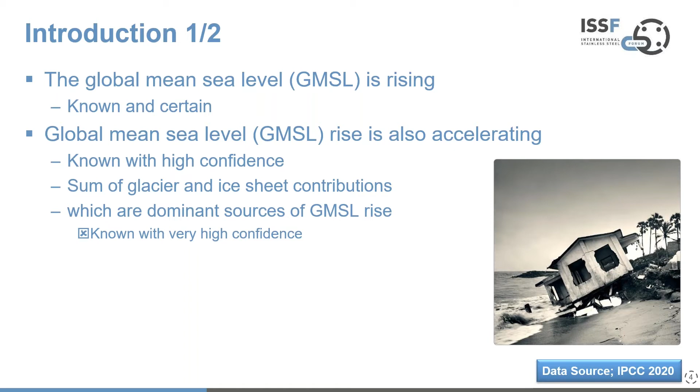It's not just rising though, it's actually accelerating, and this is understood with a high degree of confidence. And really there are two main features. It's glacier melting and contributions from ice sheets melting, and these are the dominant two sources. Again, this is understood and known with a very high degree of confidence.

However, we need to link all these developments to the United Nations Sustainable Development Goals. And looking at what's known as climate resilient development pathways, this requires some serious effort to contain sea level rises, because you can't just switch these things off. And when I get to some of the charts that actually show what's happened historically up to 2020, and then how that is likely to look in the future, you'll probably see that we do need to take some significant efforts.

Now, through the course of this webinar, we're going to look at a number of approaches for protecting our coastlines. But there are two key approaches that are really worth considering and need to be considered. That's hard protection, building a barrier, and what's known as building advance, building out into the sea. And these are two arguably economically efficient approaches because you deliver protection, or you avoid land being swallowed up. And for urban settings, this is well understood and well used.

However, because you're offering protection, taking a long-term view, actually you don't see the impact that potentially could come later. So there is a risk associated with hard protection if it's not really thought about in a long-term setting. But also, there's the concept of equity concerns here, or the difference between the rich and the poor nations. And the people that are in the most vulnerable areas are probably, in many cases, the poorest nations.

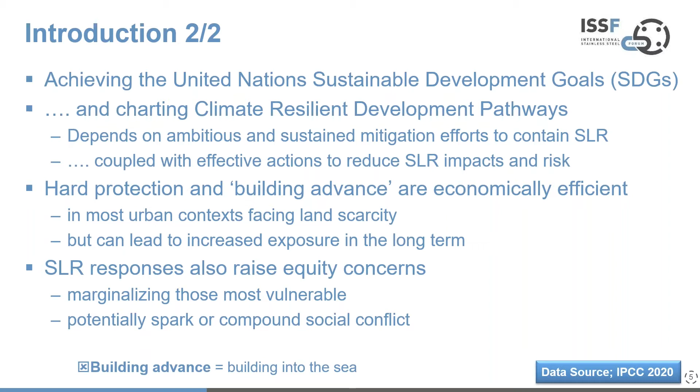I'd now like to move on and talk about global mean sea level rises and illustrate what we're actually facing. So what do we know? So here is some data from the Intergovernmental Panel on Climate Change showing the level of sea level rise over some interesting time blocks. What you can see from those numbers is that since the turn of the 1900s, that increase has been rising, slow at first, but it's accelerating without a doubt. And the dominant cause is something known as anthropogenic forcing. So that's what we do as people. That's the influence we exert on habitats and environments. So the responsibility sits with us, and that's been more and more prevalent since 1970, essentially.

The worrying thing is when you start to look at the trend over the next 80 years, looking at different pathways, and there are many of these representative concentration pathways that have been described, the average sea level rise is going to sit at around 0.6 of a metre, somewhere between 0.43 if we allow the global mean increase in temperature to not exceed 2 degrees centigrade, or closer to a metre if we continue on the path that we're already on. This is the 6-degree increase in global mean temperature scenario. So there's a range of possibilities, but none of them are good, and there's different pathways in the midst of these two extremes that I'm showing at the minute.

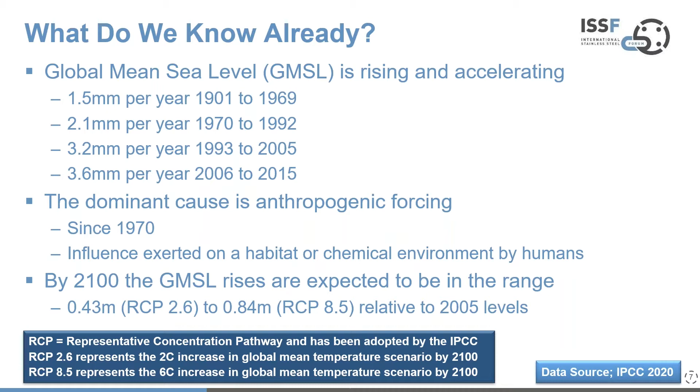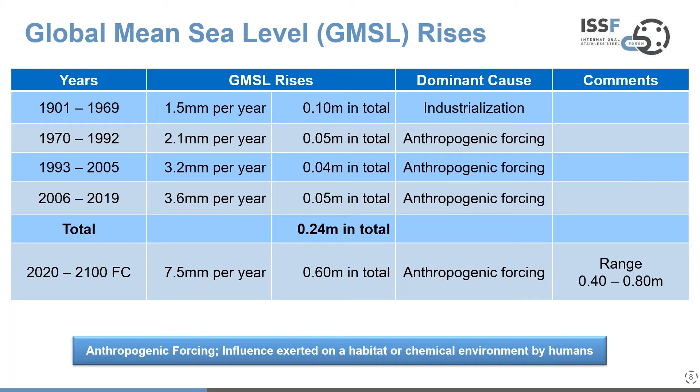So this table just summarizes very simply the same data from the previous table, so I'm not going to go over and describe that, but it puts things in simple context for reference. But also it's worth reflecting on, over the period 1980 to 2015, worldwide catastrophic events and how they've changed. And this chart shows, for specified years, of which there are 5 in this chart, the different number of serious events, whether they be meteorological, hydrological, or climatological. And you've got the description at the bottom of what they actually mean.

But what is absolutely scary is the percentage change in the number of these events in these year intervals that we're showing here. So approaching a 70% increase in total on this combination of events. And of course, hydrological events, which is interesting for this particular webinar, has gone up almost 80%. I don't yet have the data for 2020, so I was not able to show that. But this is quite frightening. And it's also known, and this is Red Cross data, that approximately every $1 spent on reducing the risks from disasters will save around $7 of clearing up damages later. So there's a massive impact. It's a 7-to-1 impact, and that's an important message to take forwards.

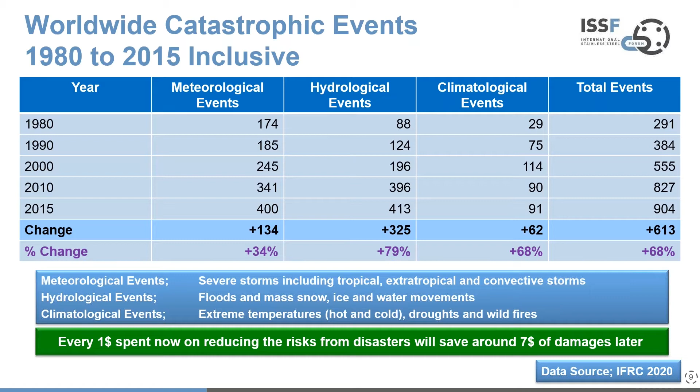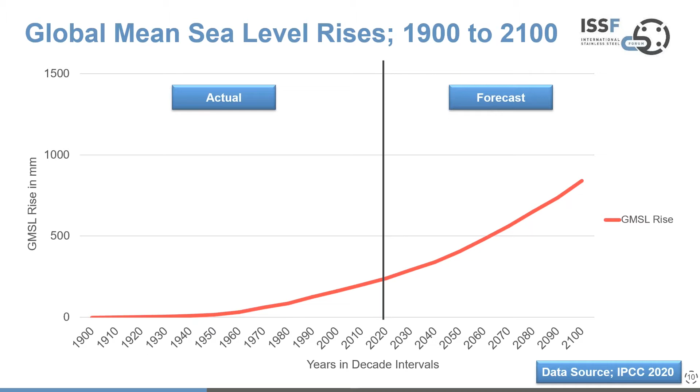So let's have a look at global mean sea level rises. So this is the actual events from 1900 up to 2020, shown on the left-hand side in the actual section, and then the forecast of how it's going. And this is mean sea level rises. So of course there will be some variation around this, but you can see the trend. And if that trend continues, that's quite worrying. Now, just before I move on, note the scale. This goes from 0 to 1.5 meters, this scale. So the next 80 years, we're going to be pushing upwards towards a meter if we change nothing. This is based on the 6 degrees scenario.

If we now put extreme rises on there, you see how the blue dotted line now looks. And these are the variations that we see naturally. So these things do occur. They're not there day in, day out, but these extreme rises will affect different parts of the world at different times. So we have to consider that the average, the mean sea level rise, is not the true picture.

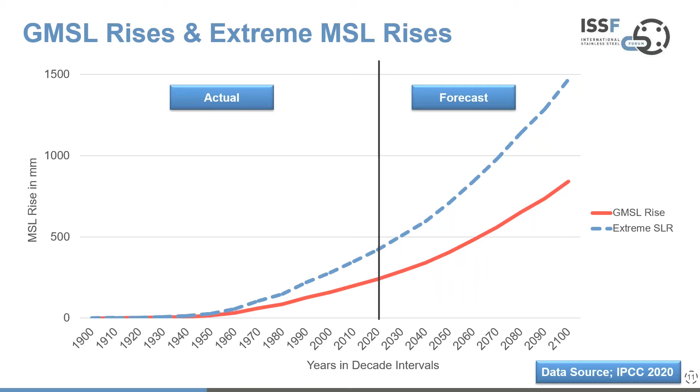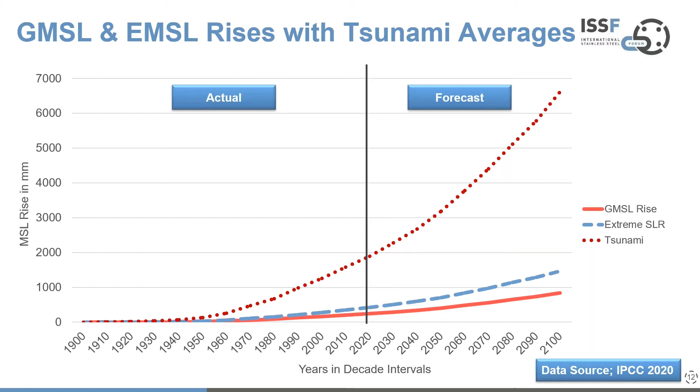And this is the same scale, 0 to 1.5 meters. What I'm now going to do is impose the average tsunami position on this. And now this is a different scale, 0 to 7 meters. And you can see the average tsunami line, the dotted red line, is frightening. So this puts in context, whilst we are facing some significant average sea level rises, there are some disastrous effects that we just cannot avoid. And doing nothing and having a heavy reliance on fossil fuels is only going to make this picture look at its bleakest, I think.

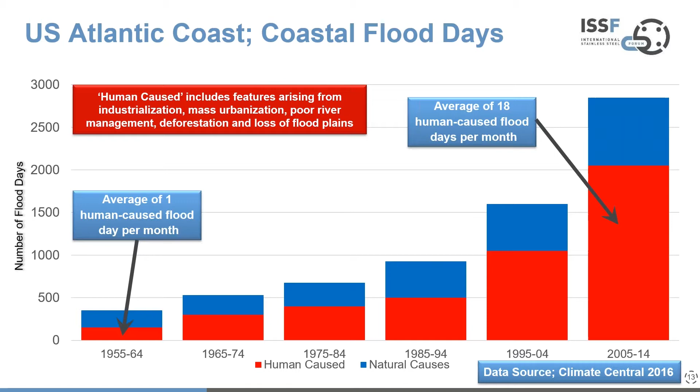We know that we've got increasing average and extreme seawater levels and an increasing frequency and severity of the extreme events. But then we have to balance that up, reminding ourselves that coastlines provide a base for some very important economies. I would describe them as a societal people magnet. People like to go to coasts. We can't change that, that won't change. But also, we are responsible for using coastlines as a dumping ground for undesirable wastes. And there's many, many experiences that we will all remember over history of some undesirable effects.

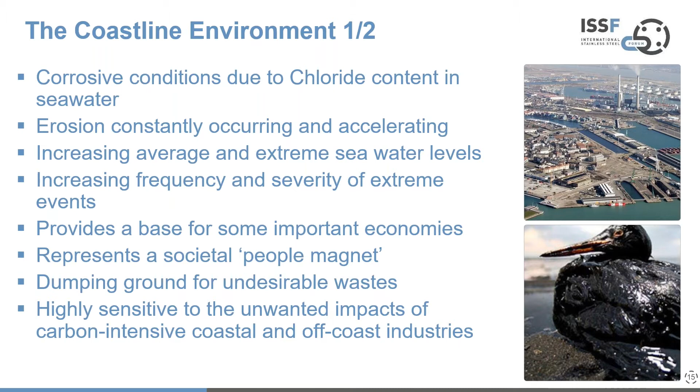But we should equally remember that coastlines are highly sensitive to the unwanted impacts, I should say, of carbon intensive, both coastal and off coastal industries. And they then take a long time to recover. So we've been doing some damage to our coastline for considerable amounts of time. And we already know that coral reefs, for example, are highly bleached, and that will take huge amounts of time to recover. So the first question I'm going to pose is, can we really preserve these idyllic coastal settings, look after the coastline economies, support the coastal ecosystems, provide safe holiday environments? We've caused, as a race, lots of devastation. I think we all have to take personal and collective responsibility for that.

But a question I'd like to pose here is, if we lived a lot longer, if we lived for 250 years on average, would we actually have thought differently? Because we'd then be living with the consequences of our actions. And I think it's important to have that thought in our minds, because that will change what we do in the future.

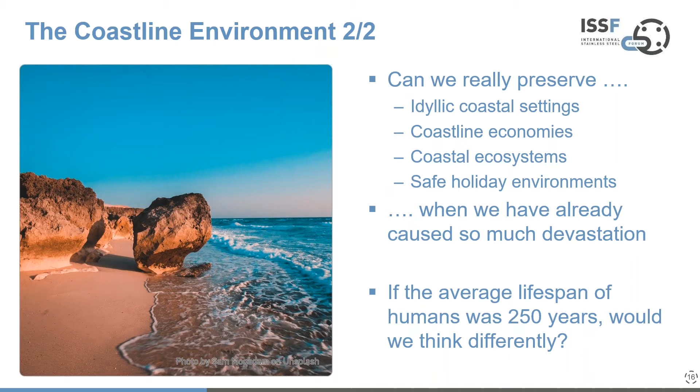We still have a short-term sort of piece of thinking in many of our minds, and I've been equally guilty of that. And that's driven often by installation costs and material costs, considered well before life cycle thinking. But we have to recognise, and we should recognise, that life cycle costing is becoming more important. And from a position of finance companies, they are wanting to see this piece of thinking in new projects.

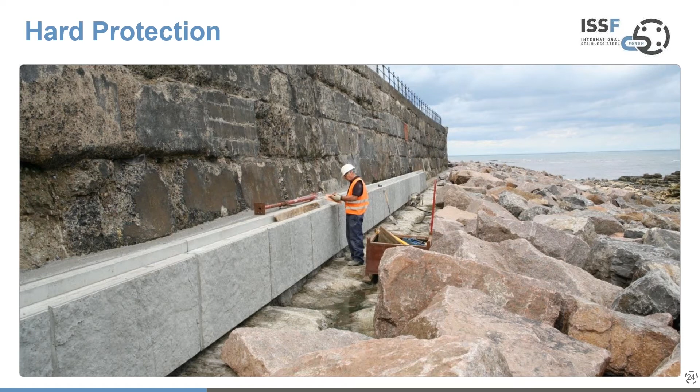So in the area of hard protection, what we're going to start looking at is physical barriers, obvious things. And I've got 2 examples here to illustrate. The first one is the Bayonne Breakwater in France, which was protecting a harbour in France, and there were a lot of ships sadly grounded on this breakwater due to the very rough seas. So the rough seas necessitated the protection, but it was also problematic as well.

And a repair was needed to this breakwater. The requirement was a service life of more than 50 years with 0 future maintenance. But in order to achieve that, the owners knew they needed to seek some technical assistance. However, the project manager who was appointed to this project understood the benefits of stainless steels via the Progreso Pier case, which I will illustrate towards the end of this presentation, where we get to life cycle costing. So there was some understanding that there was a material out there that could assist with this repair.

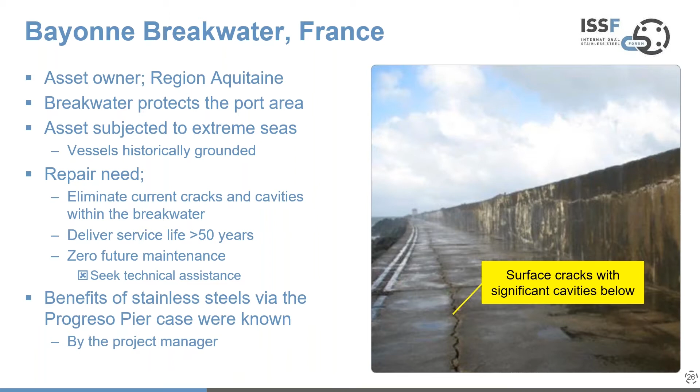So with this solution, we had a material that could not corrode in the environment, but also because of its high yield strength, it meant that a much lower tonnage of stainless steel was needed compared to carbon steel if that had been chosen again. And the original solution was with carbon steel. So there was good reason for choosing a stainless steel here. It ultimately led to a very sustainable solution.

Just as carbon steel is made mainly from recycled steels in rebar cases, so is stainless. So there's no difference there. It's both part of the sort of circular economy, but a real benefit from choosing the stainless option. And we would expect the service life to be closer to 100 years with really minimal maintenance.

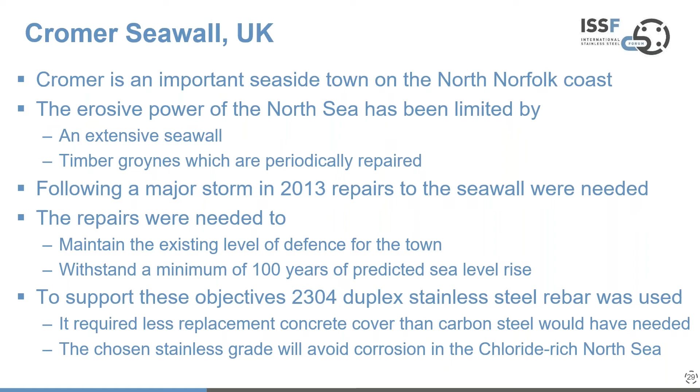So in 2011, Miyako City was hit by a tsunami that was around 10 meters in height. The sad thing was that more than 500 people died, and almost a quarter of the housing of the city sustained significant damage. So this is a real example where an extreme event causes a huge loss of life and major damage to the coastal city. So to cut to the chase here, the response to that was to build a significant seawall, 9 meters high, and 20 lock gates as well along that section of the coast.

Again, this was a case where duplex stainless steel was chosen for the lock gates, and previously they'd worked with an aluminium alloy, so the increased strength of a duplex stainless steel allowed an overall weight reduction per gate, which was really prized, given that aluminium alloys are very light. The construction cost by designing with and choosing a stainless steel was reduced compared to previous designs. There was a huge step up in corrosion resistance, and the design and the height that was chosen allowed this structure to withstand the pressure of 10-meter high tsunami waves.

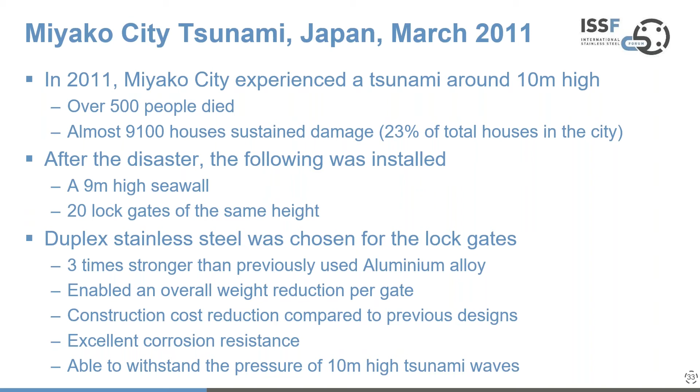Okay, so now I'm going to move on to something a little different and talk about infrastructure crossings. And in this section, we're looking at essentially bridges that cross seaways. And many people will say, why is this a coastal defense thing? What we have to remember in our environment are things like people flows and trade flows that we can't just switch off, to allow our cities to operate as they do, to allow businesses to be successful, to allow international trade to occur in a successful and streamlined manner. We need bridges, and bridges across significant seaways are really important.

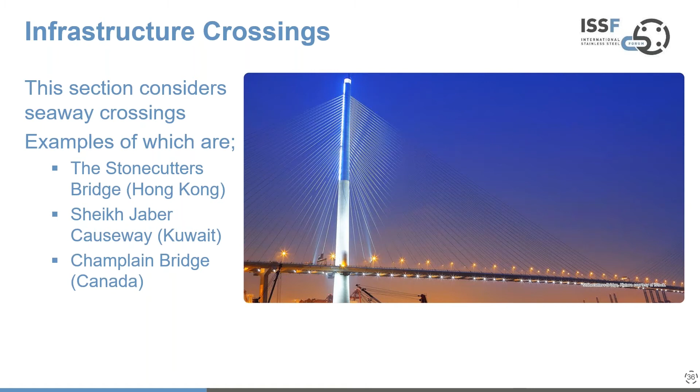And I've listed 3 examples. On the left, the Stonecutters Bridge in Hong Kong, the Sheikh Jaber Causeway, that's just the abbreviated name, in Kuwait, and the Champlain Bridge in Canada. And I'd like for this example to focus on the Samuel de Champlain Bridge in Canada. And there's a beautiful picture of the bridge in all its glory. But let's just put this in context.

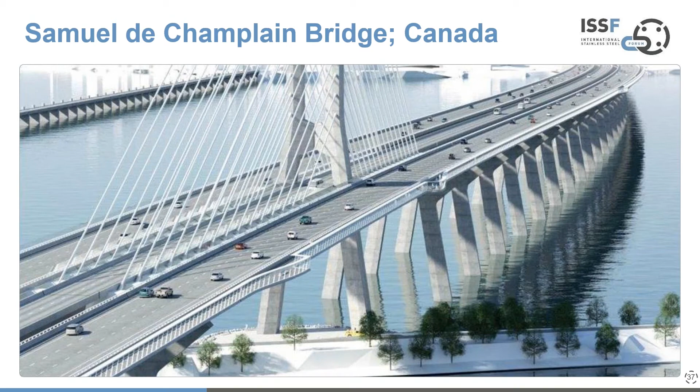So this is almost a 3.5 kilometre long bridge over the St. Lawrence Seaway in Montreal. It's used by in excess of 50 million vehicles per year, including way above 200,000 buses. There are 11 million transit users per year, and of those, 2/3 of them are commuters. So this is why these sorts of structures are important. And also it supports $20 billion of trade between Canada and the US each year.

There was a bridge that was built back in 1962, and this was not designed for either the current traffic needs of when this was looked at in the early 2010s or the future traffic needs. And that structure was suffering from corrosion of the structure and concrete degradation caused by both the seawater and de-icing salts used because of the extreme weather conditions on the St. Lawrence Seaway.

And the degradation of concrete came from volume expansion of the rusting steel inside the concrete, because corroding steel increases in volume due to the volumetric expansion when iron combines with oxygen. And that also changes the pH as you get carbonation of the structure, which causes further degradation of the concrete. So that combination of having a seawater environment, using de-icing salts, a lot of traffic over the bridge causes a lot of problems when you have a rusting product inside the concrete.

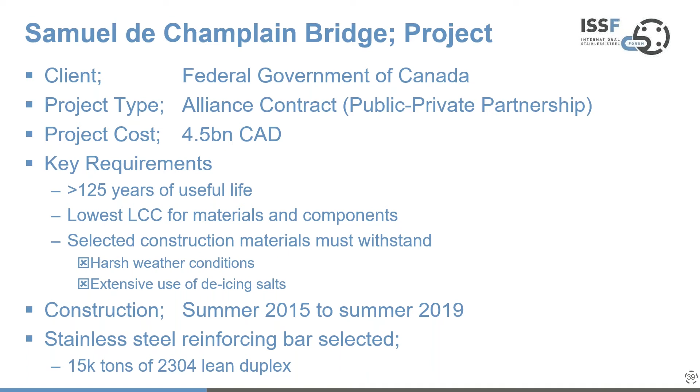The key requirements were at least 125 years of useful life and selecting materials and components with the lowest life cycle cost. And that's important to reflect on. These people were really thinking about life cycle costing. And I've talked about the harsh weather conditions and extensive use of de-icing salts. This is an extreme environment up there on the St. Lawrence Seaway. Construction ran over 4 years, 2015 to 2019, and stainless steel 2304 duplex reinforcing bar was selected. And this was a significant project, 15,000 tons. So very significant use of stainless steels in a single project.

So why, for this project, do they choose stainless? Well, it was one of the few materials that was certain to operate for over 100 years with virtually minimal or zero maintenance. The lean duplex stainless steel was chosen because of that combination of really good corrosion resistance and high strength, particularly with respect to chloride corrosion, as I've mentioned. And it won't require any challenging maintenance regimes. It's important to reflect on the old bridge, the old structure built in 1962, operated for 57 years, but every year it was expensive to maintain. And that's not something we necessarily want. We want to build with a sort of fit and forget mentality in our heads.

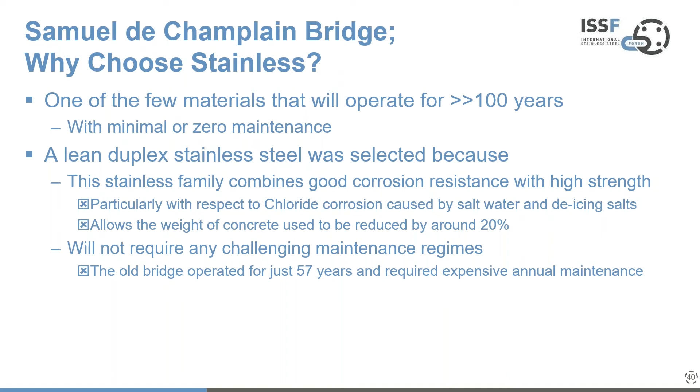And the wall itself quickly dissipates tidal energy. So it acts as a barrier, but in a different way. It's taking energy out of the onrush of water and waves. So it protects effectively high coastline areas, as shown here, where you've got arable land. And one of the things you have to remember is, because these cages are built from a wire structure, in essence, they're subject to both erosion and corrosion. The rocks move around in the cages. When they hit with the seawater, they'll settle over time. So choosing material that is coated, something like a galvanized steel product, you'll lose the zinc coating through erosion primarily. So you need to choose a material for these applications that is going to hold the rocks in place for a long time. And again, stainless steel wire is the optimum choice, because then it's a fit and forget feature.

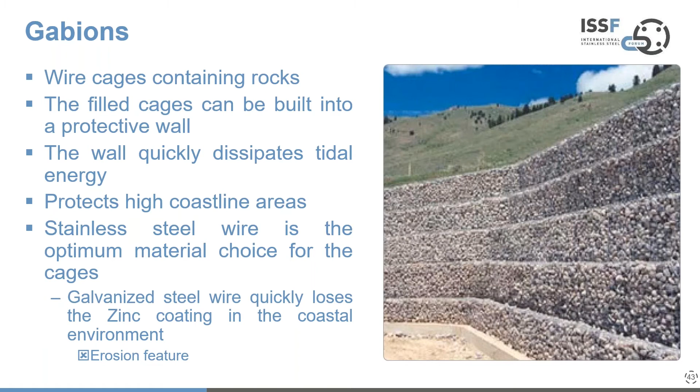One of the other areas we need to consider is cliff mesh as well, in order to protect some of our cliff faces, particularly with the erosion effects which are exacerbated by extreme weather events we see now. Looking at wire mesh using stainless steel and rock bolts to secure those meshes in place becomes, again, the optimal choice, I would argue. You've got the same features going on if you choose a galvanized steel wire. You will lose the zinc coating, and something that's not protected, even if you think about epoxy coatings, the erosion will wear away the coating and you'll be into a mesh that fails.

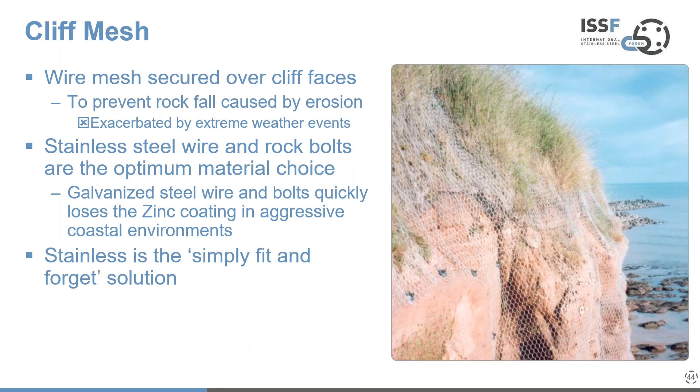So I would argue, first and foremost, that whilst stainless may be a little more expensive up front, the notion of let's simply fit and forget has a lot of benefits. As extreme weather increases, the last thing you want to be doing is sending people up cliff faces, refixing mesh onto these cliff faces. So we have to think about, is maintenance in the future even going to be safe, not just about the choice of materials up front.

So now I'd like to, as I get towards the end of this presentation, and we're running perfectly to time, which is good, just look at life cycle costing in a comparative manner. And I'm going to illustrate this with the Progreso piers, which I talked about earlier in the presentation.

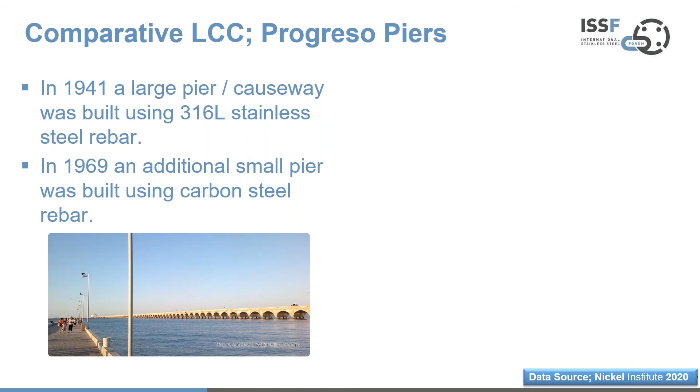Back in 1941, a large pier or causeway was built using 316L stainless steel rebar. This was a very early use of stainless rebar. And you have a picture just below showing that causeway in modern times, still perfectly intact on the right. Then much later, in 1969, an additional pier was built using carbon steel rebar. And you see now the relative comparison below.

So after 40 years in service, the carbon steel rebar pier had all but disappeared. You just have a few stanchions left, and the 1941 pier is still intact and looks good. So this is a really wonderful example of material choice. I know the smaller pier built in 1969 was not built with the same purpose in mind, but if we're thinking about trade routes and climate change and extreme sea level rises, we have to think about building with materials that will last more than our lifetimes. We have to think of the 250-year lifetime concept.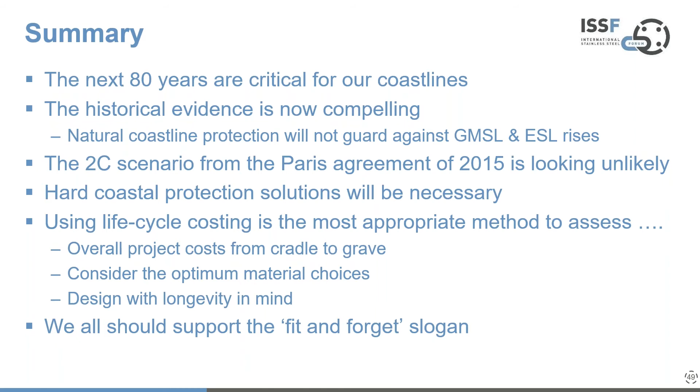So in conclusion, we must all together take key steps to create long-term hard protection for our coastlines, for our coastal cities, and to guard against the increasing frequency of extreme events. And many of our major cities around the world have seen these and experienced these, and they're not good. We need to protect our trade flows. We need to think about materials that will have at least 100 years of service life.

We have to remember, if you have to go in and refit a hard installation, a hard sea barrier, when climate change is worse than it is today, that's going to be an impossible task and will undoubtedly result in loss of life. And would we be really happy with ourselves if we were being forced to make those decisions?

And I would equally argue that stainless steels do offer the lowest life cycle cost of all materials when you're thinking coastal infrastructure applications, because there's a lot of unpleasant conditions there, and stainless steels will protect against those challenging environments. But it is all about correctly specifying the material grades. There's broadly 100 different stainless steels out there. It's not just one material. We have to choose the right grade for the right application and the right product forms too.

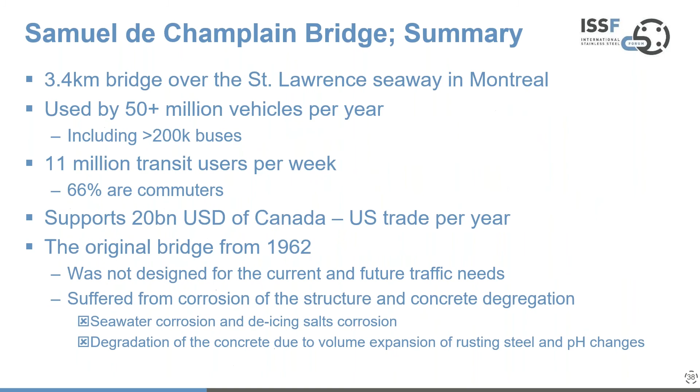Thank you, Tim. Okay. If you could go back to slide 27 on the Bayonne Breakwater. On that particular slide, you pointed that duplex was used for the rebar for the concrete slab. Was the duplex also used for the anchors underneath the slabs? I believe it was. I believe it was a full use of anchor bolts and rebar, but I can check that. I guess we've got the name of the questioner. Yes, we do. So I can check that and respond by email if that's okay. So we'll double check and get back to that question later.

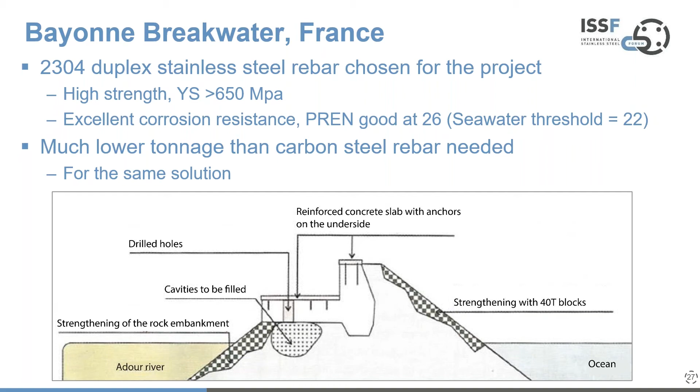And then the next question was about the Miyako city case, so the lock case. How was the overall weight reduction achieved for these lock gates? So it was a different structural design, which I don't have the detail of, but again, I can find that out and get back to whoever's posed the question. So it'll be primarily the internal design of these things. The obvious thing is with a much higher strength material, you go thinner, but the internal design as well will be an important component of it. So I'll get the detail of that. Okay, we can do that.

And then the next question is this. Is it now accepted that a PRE of 22, just below 316, is adequate for concrete in seawater? Does it assume a specific cover, the concrete cover? Yes, well, there are calculations that I don't have to hand for the amount of concrete cover that is needed, because you're not going to stop chloride ingress through the concrete. But what you will truly stop is the reinforcing bar rusting. Therefore, you will not get a volumetric expansion, and the concrete will not crack and fall away. So there are calculations for the cover. I can get those and supply that information if somebody is specifically wanting that.

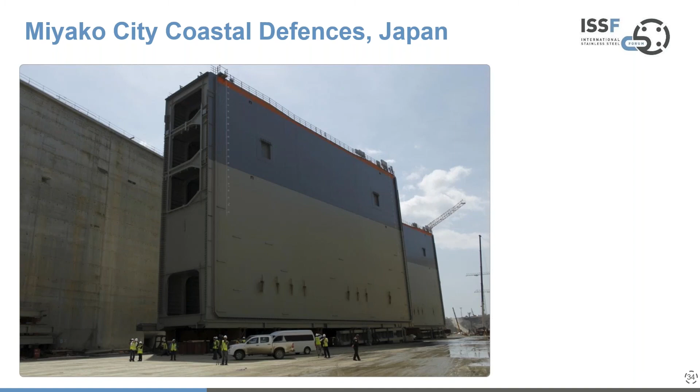That's absolutely fine. And then there's somebody asking what kind of surface treatment, so surface activation and painting specification, is specifically needed for these coastal areas. So painting of the structures. Yeah, that's a good question. I don't know the answer to that. I would argue there are coatings you can certainly put on concrete that claim to reduce chloride ingress and things like that. But it's not my field of expertise. But we will check that out and come back with an answer. Okay, very good.

There is a question coming up. It says you provided some examples using long products. What about flat products? Okay. So there is no doubt that long products have been quite dominant in coastal defences. But if you think to the Japanese example with the floodgates, that is a very classic use today of flat products, because this is thin plate that is used primarily for the structure, and a large proportion of that lock gate is made from flat products. So where you're looking at features like that, it is very much flat products heavy in terms of the consumption.

But you're right, predominantly long products are used, particularly in the invisible parts and for things like gabions and meshes. It's mainly long products, but there are increasing opportunities for flat products. Equally, there are inquiries coming in now for repair sections, particularly at ports, where piling plates are being considered in stainless in order to assist with the port work on a faster basis, because the costs of running a port and not having ships' berths in action is extremely expensive and detrimental. So it looks like there are more opportunities creeping in for flat products in this world.